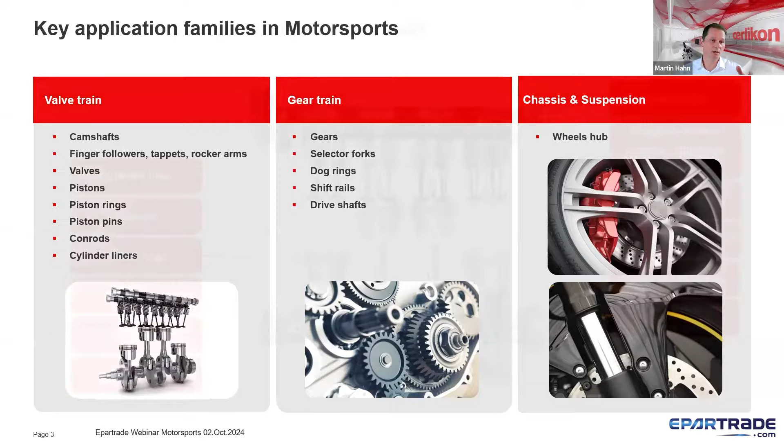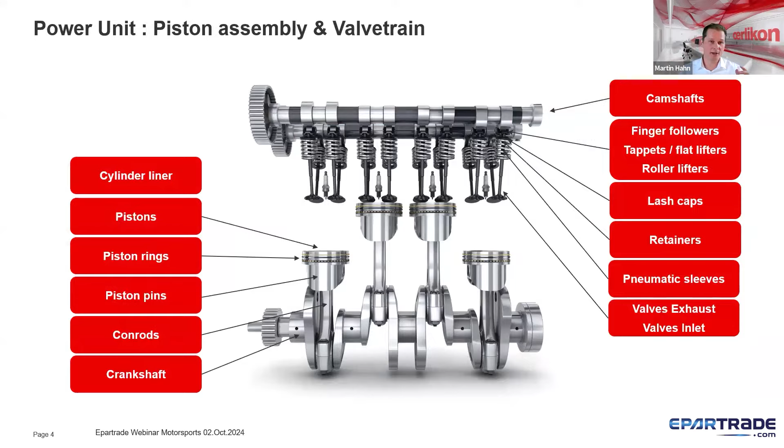Yes, and especially today we want to talk about the valve train. So let's go ahead with the full picture of the valve train. I could count every component, but mainly we are able to provide high performance coatings for everything between the cam cover and the oil pan, let's say like that.

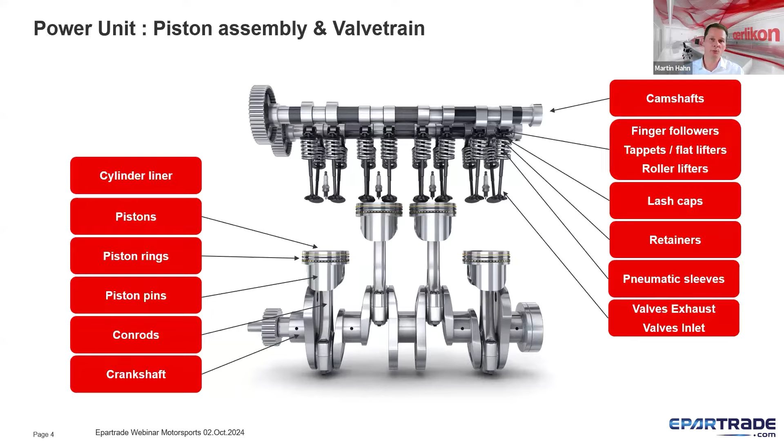Today we take a look at the Oerlikon Balzers S3p technology, and this is not only for the valves - we can coat other valve train components with it too. I'll introduce that later once you have the knowledge and understanding of what the Oerlikon Balzers S3p technology means.

Yeah, no, I would say that's pretty incredible. And when you start talking about coating all those different surfaces, in some cases, are we talking about different types of coatings? I'm sure you're going to get into that depending on whether it's a friction surface or maybe something you want to add strength to.

Yes, exactly. And especially for the S3p technology, you will see what the difference is at the end and how we manage that, so you get a great picture of the technology and a deeper understanding of how we manage that. Apologies for interrupting - I was just in awe of the amount of different components you can offer.

With the Oerlikon Balzers S3p technology, we are combining arc evaporation and magnetron sputtering, taking the benefits of both technologies. Of course both technologies have their drawbacks, but let's take a look at the benefits. From arc evaporation we have high ionization of the deposition flux and dense coating, and of course pretty good adhesion - that's what you want.

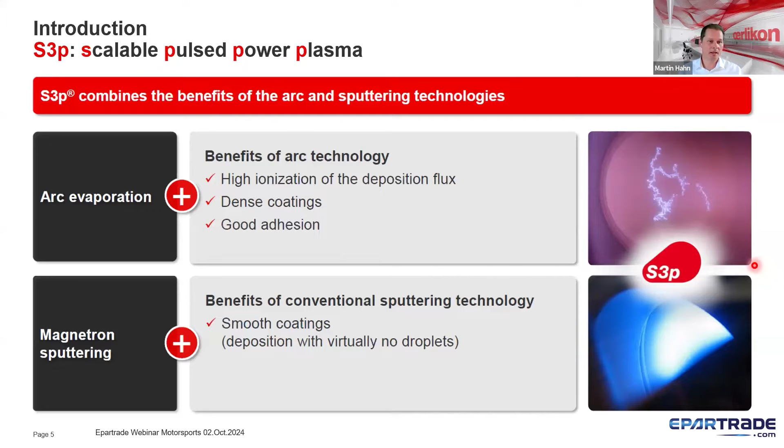So as you can see, we have a lot of positive things, and we also have the drawbacks known from each technology individually. Now we're going to manage that with the Oerlikon Balzers S3p technology. I'll show you that on the next slide.

Here it's a really theoretical picture. We'll get into some more realistic pictures later, but it explains very well what we're doing with the S3p technology for Oerlikon Balzers. And I'm very happy to say that it's 100% Balzers development, thanks to our R&D team.

We can see here on the right picture the conventional borders of HiPIMS, the high power impulse magnetron sputtering. And on the red line, the range is much higher - nearly double, more than double - from the S3p technology. So what makes the difference?

With the S3p technology, we're able to scale the pulse duration and the plasma density. The R&D team was able to scale the pulsation time, and also make the power of the pulse more constant, let's say. That leads to more power on the target, on the deposition, and we get a higher ionization of it, and due to that higher ionization, more metallic content in the coating at the end.

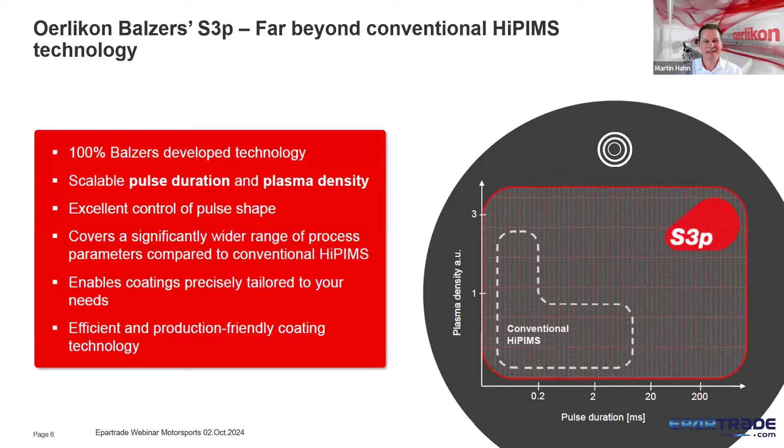What does precisely mean? Maybe you didn't expect this, but now we're talking about a drill. And it isn't a simple drill like everyone has on their workbench at home - it's a dentist drill. If you can see it, the diameter on the tip is around 2 millimeters, so really, really small.

Especially on that tip, where we have the sharpest part of the drill, it's not just a phrase anymore to say we're providing cutting edge technology. You can see it here on the cutting edge of this small drill, how consistent and how smooth we are following the design of the raw part, the substrate in this case.

With conventional HiPIMS technology or magnetron sputtering, you can see that the growth of the coating is not as fine and consistent following the substrate material as it is with the Oerlikon Balzers S3p technology. That's incredible, and I'm really happy to show that to you.

Now you're asking me how that matters for valves. I'll show you that on the next slide. Here we have the difference - you can see it here on the pictures below, side by side, the different technologies now under microscope.

If you compare that to arc evaporation - we talked about the benefits and drawbacks of that technology - you can see it here directly in the picture. We can see perfectly the droplets, and these droplets are pretty hard from the arc evaporation.

That's also a point we address with the technology, with the coating, but it is absolutely necessary to have a post process - some kind of brushing or band finishing or whatever - to manage the drawbacks of that technology. We do of course have that technology in our portfolio too, but with the new developments we have with the S3p technology, we have a much better base and a much better use case for our customers.

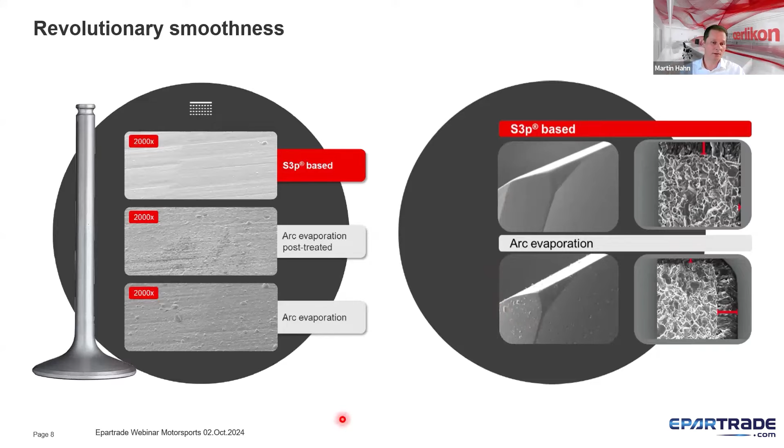You can see that here also. That's more theoretical, but regarding R&D and testing and so on, we have here the calo grind which we use as part of taking care of our coating quality, how consistent the coating is. It's also important to know it's a monolayer coating, so we don't have different layers on it. It's an aluminum chromium nitride based coating, which also contributes to the heat stability. And we can have different combinations now.

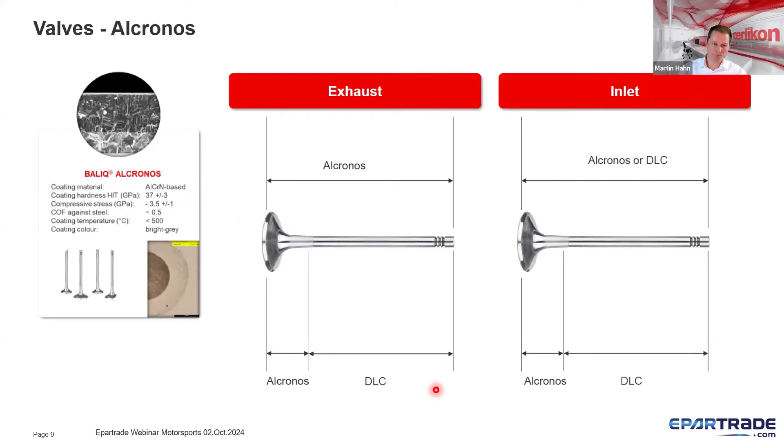But this discussion also leads us to what kind of coatings we have for valves where we don't face these high gas temperatures. And there, of course, we also have solutions. We can provide the Balinit coatings, starting with the Valdura, which also has very high temperature resistance, around 900 degrees, with a coating temperature around 500 degrees Celsius.

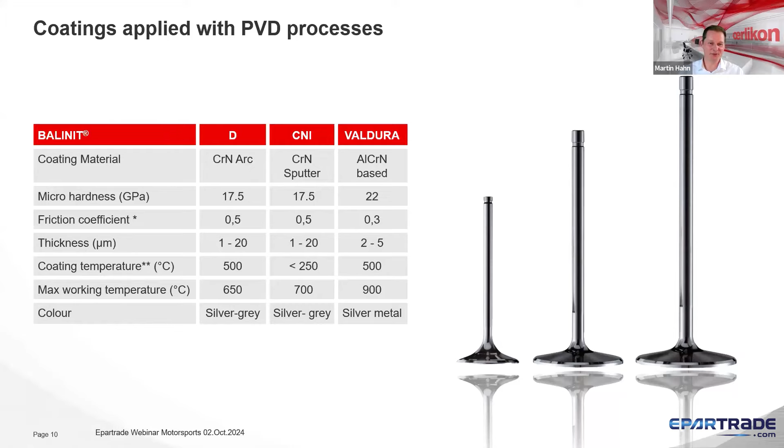We talked already in the beginning about the complete valve train. And I want to show you also another component or coating we developed with our R&D teams, especially in motorsports, and we now have in our product portfolio coatings especially for steel cylinder liners. There we are able to provide a DLC coating for cylinder liners, which works against wear and friction.

What we see here on the picture is a kind of standard cylinder liner, a standard steel cylinder liner, but we are also able, when I think further, for example, of two-wheelers, especially the motocross bikes where we have only one cylinder with one aluminum cylinder head. We also did some investigations and trials to coat that, which worked as well.

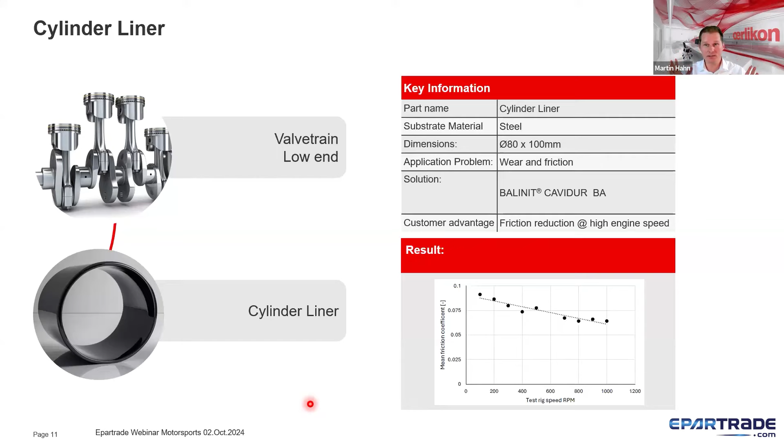We also talked about the gearbox and gear train, and therefore we also provide several solutions on gears, on shafts, on the rails, on the forks, and of course also on the dog ring. So we have a solution for every component you have in your gearbox.

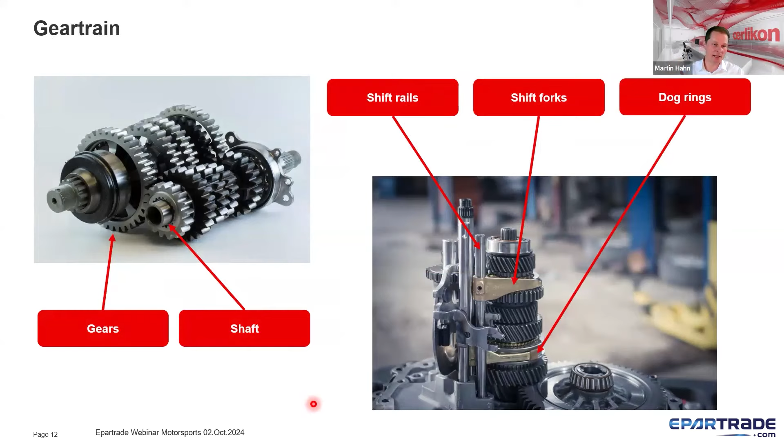And additionally, we did some further developments. Today we're not talking only about ICE engines. From my perspective, they have the most fun, but meanwhile we also have totally electric series, like Formula E or rally with E and so on, and therefore it's also pretty interesting. We have more load on the gears here, for example.

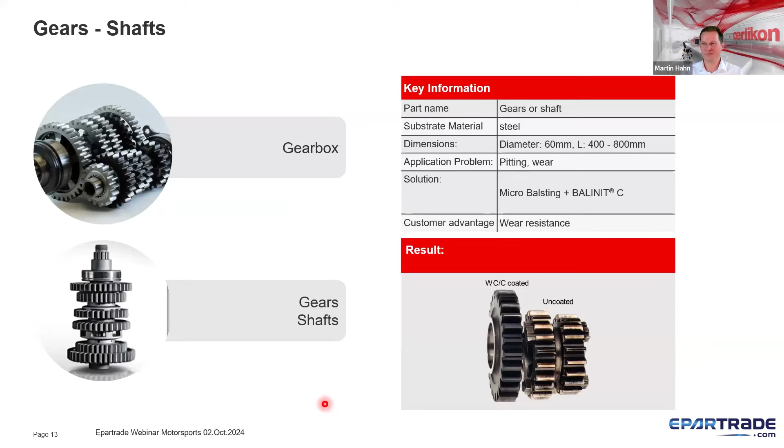Yes, I hope I could give you some insights.

Yeah, absolutely. And if you want to leave that up there too, Martin, we did have a question that came in a little bit earlier on email, which I want to throw out at you. It says, we're after a coating for some Nitronic 60 components used in a bearing configuration, with one of the mating substrates being 303 SS and the other being uncoated Nitronic 60. The temperature in application is plus 1000 degrees Celsius.

Ideally, we're looking at this operation being completed in China, where the Nitronic 60 components are manufactured. Can you recommend a coating and suggest contact details for this project? So a handful of things that I didn't understand, I'm sure you did, but how can you help that person? But I would recommend the same.